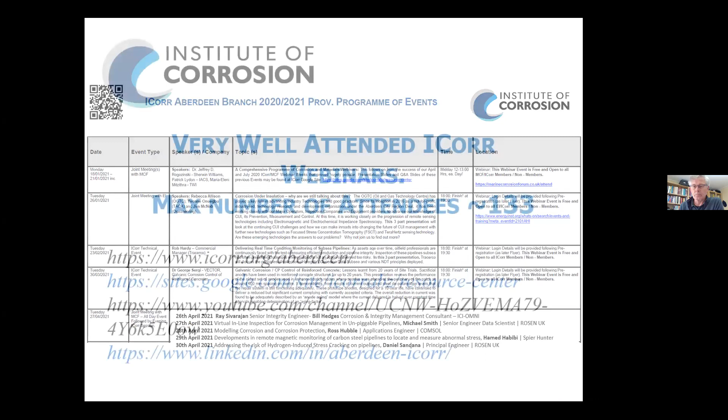And in April, last month, we had a great lineup of webinars with MCF, and it was very well attended, pretty much all over the world. The audience came from many countries, and then we recorded most or all of the webinars and put them online, and it was very well received.

In summary, very well attended ICorr webinars. In fact, the COVID situation has been a bit positive for us because we have been trying new techniques and new ways of doing things. Recently we have put all of our webinars recorded online. Today's webinar is recorded as well. We have been putting all of them on our YouTube channel, which you can see here, the link there.

And then we announce all of the webinars, and we have been doing it for quite a few years on LinkedIn, as well as sending out emails. If you haven't received any email from us, please feel free to drop us a line, and we will add you to our list, and you will be receiving constant updates from us. And if you don't find us from there, please feel free to join our Google group, where you can actually find a good 10, 11 years worth of resources, free of cost, free for use. Anytime you can use them, access them, and if you need any help, please feel free to contact us.

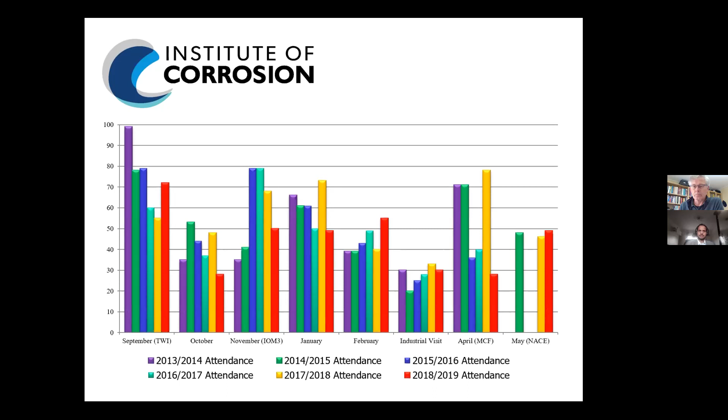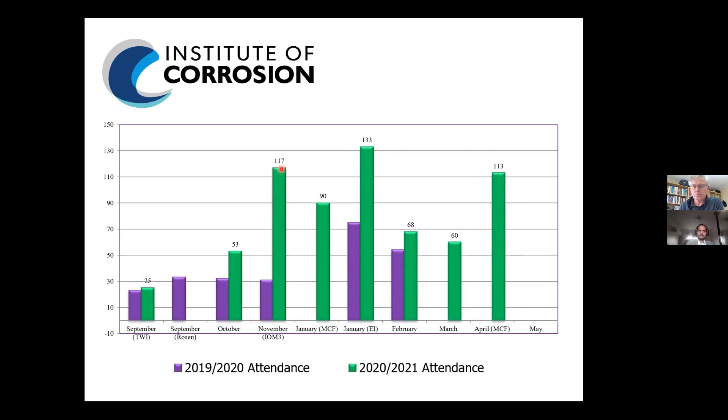So it's been a great year for us. With that, the most important business of the AGM is to continue the good work we have been doing over the years, and to keep it continual, so that we can actually provide support and help to all our community members in Aberdeen, as well as

now internationally as well. So for Aberdeen committee, we have got a kind of a tradition that the vice chair usually takes over the chair position, but we still go through the democratic process of being proposed and being seconded. So Human, Dr. Chetan, who's on the screen, thank you very much for coming on video. Human has been very kind to do the vice chair job last year, and he's been great in accepting the chair position. We went through the democratic process. We have got a meeting every month, so we requested to see if anybody is going to propose him, and

Dr. Olubayo Latinvo, who's Dr. Oli to us, of course, proposed him, and then Bryn Robert was very kind to second him, and with that we have elected Human Dr. Chetan as our chair for next year, 2021-2022. Would you like to say a few words with that?

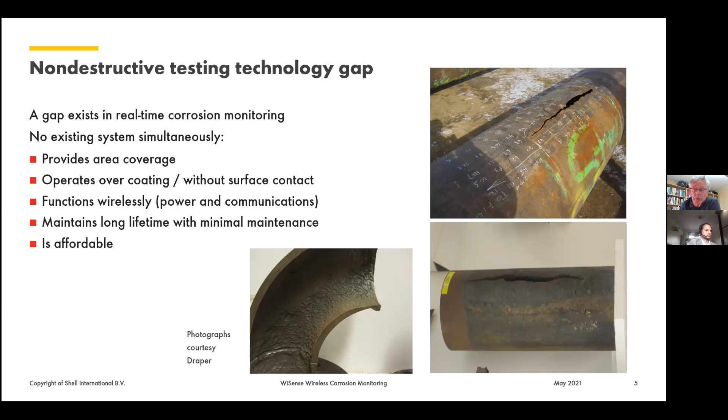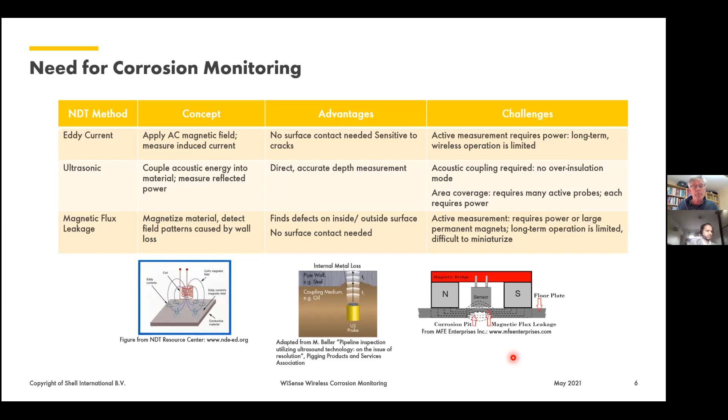And you can imagine that takes power, and that is not a good start if you want to make a system wireless. So we were looking at something that could operate without using too much power and still have capabilities to find local defects. So what did that lead to? Towards passive magnetometry. Not too far away from magnetic flux leakage. And I guess you all working in our industry know that for the inspection of pipelines, ultrasonic intelligent pigs and magnetic flux intelligent pigs are being used. And our technique shares a lot of principles, but it is not actively magnetizing the pipe.

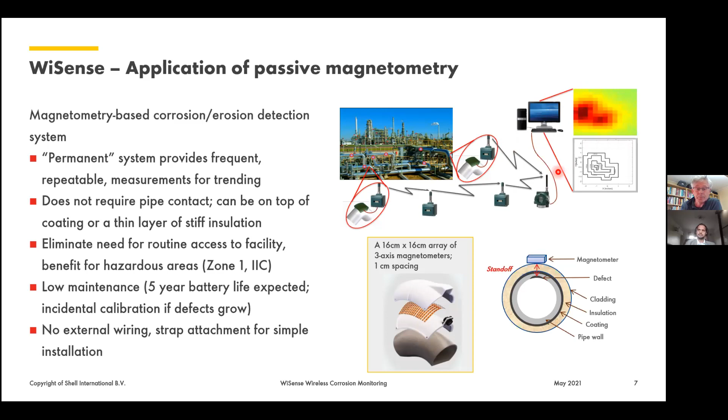A few words about the principle. As I said before, passive magnetometry, it is also called self-magnetic flux exclusion. And that is possible because carbon steel material obtains a magnetic field during the process of manufacturing. When the steel cools down, a magnetic field develops and that stays permanently in the material. And this magnetic field inside the pipe is used for detection.

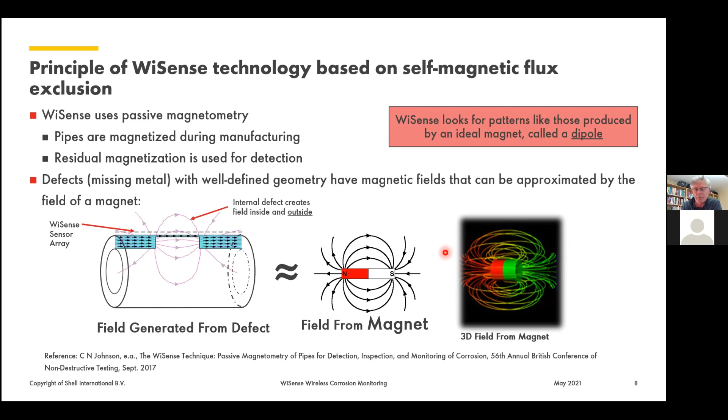It is a three-dimensional field distribution. And to prepare you for the next slides, we measure that in a plane above the dipole, and that creates a certain pattern of fields that we learn to read. We talk about a permanent sensing system.

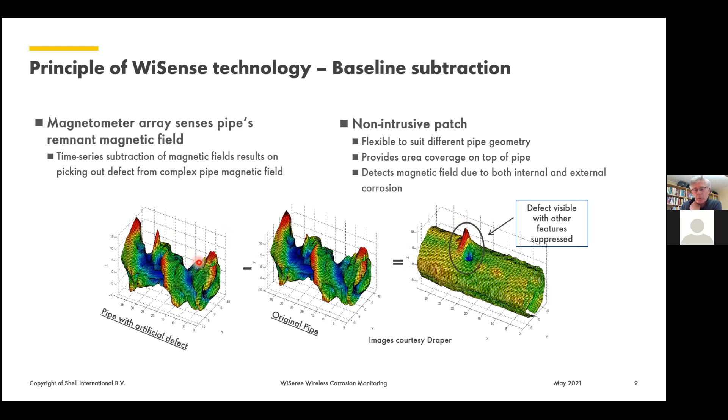So again, magnetic dipole field patterns are excited in the area where the defect is growing. And then the sensors that we put over the pipe are picking up the field, the B, the magnetic induction fields, in so-called maps. I'll explain that later. Our sensors have a square of 12 by 14 sensors in a 6-inch by 6-inch area roughly. That is the standard patch size that we worked with a lot so far.

These magnetic maps show the localized defects in terms of a dipole field. And then there is a detection algorithm that finds the corroded area by searching for such a dipole pattern. And there are complex defects. If there are complex defects, then the pattern that it searches for is a collection of dipoles.

And then there is a defect growth analysis package. So there's a detection package and a defect growth package, and I'll come back to that. That is monitoring by tracking changes in the signal size. It's detecting the growth.

And just to show you what these dipoles look like, I'll ask you to concentrate on the top line. We will not go through all three, but in the top line there are the three magnetic directions that the sensors are picking up. The sensors, as I said before, are the 12 by 14 array of sensors, and each individual sensor measures a magnetic field in one of the three orthogonal directions, Bx, By, Bz. X is along the pipe, Y is in circumferential direction, and Bz is normal to the surface.

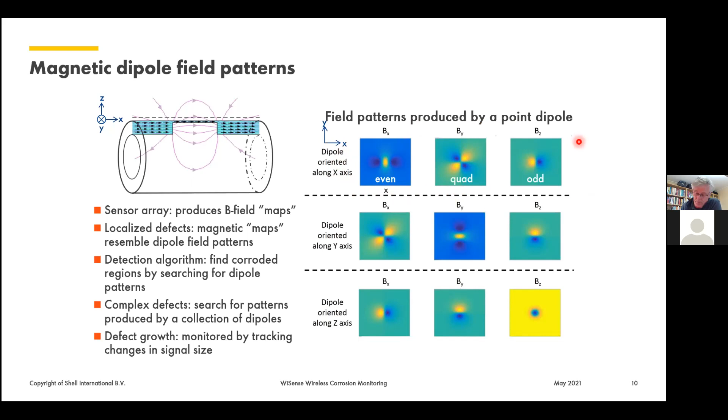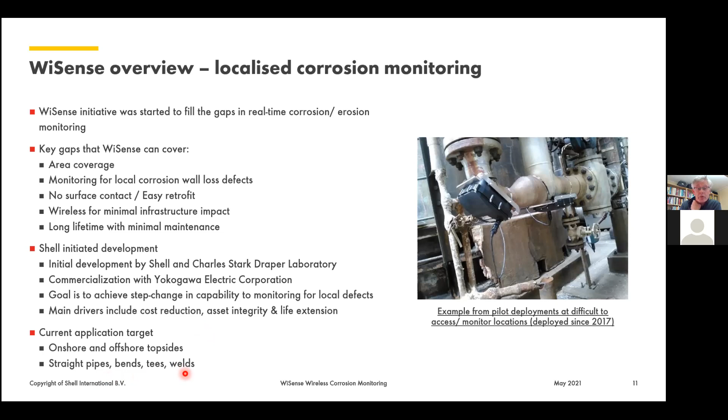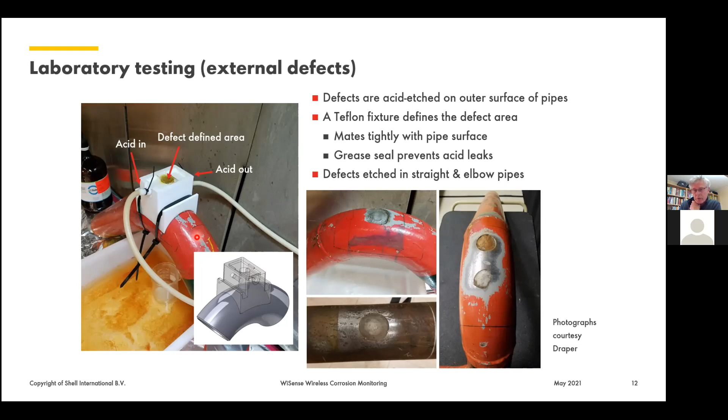We later learned you can minimize it to a large extent, but etching a defect gives you the most natural introduction of a defect without disturbing magnetic fields. But then when you want to do the real testing, you want to have the patch left in place, which means you have to introduce the defect on the other side. And if it is a pipe, you need to create access in the pipe with etching agents, letting the etching fluids run off after you drip them onto the defect area.

And this creates a fairly tedious process, which is something that comes with permanent sensing techniques. And we see that with other sensing techniques as well. You run one test and then the defects have grown to a certain depth, and then you put the pipe aside and start with a new one to generate a second test.

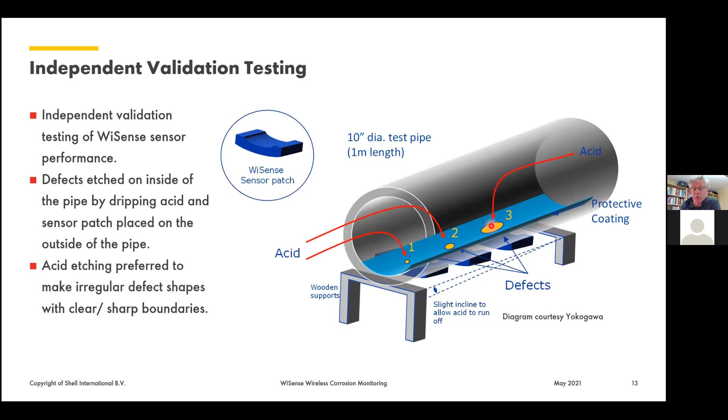We did this with the Welding Institute as an independent set of trials, and that gave us the opportunity not only to measure the defects, but also to create reference data by measuring with laser imaging and replication and ultrasonics, measuring actual sizes in various stages of the growth of the defects. You can imagine that is data that you don't get that easily from a running plant, where you might, if you're lucky, get now and then an ultrasonic reading. So, illustration of something that relates to the analysis process.

What I introduced a few slides ago is that with magnetometry we try to measure dipoles, which are in fact ideal dipoles as point sources. But real defects have a certain extent. And that means that also the field generated is not the pure dipole. And that means that we had to develop a sort of a modeling that the magnetic field is modeled coming from an extended area. And that is then translated into what we call templates.

And when a patch is developing a detection of a magnetic field, then the algorithm is starting to try to match a certain defect template with the measured field. And it is going through thousands and thousands of model templates, trying to optimize the match between what it actually sees and what is in the database of templates. And this leads to a very good detection.

One other thing I like to say, if you try to identify a dipole, the dipole has a lot of redundant information. It has a pattern in the three directions of the magnetic field, the X, the Y, and the Z. And that pattern can be detected when the amplitude of the signal is in fact still in a noise level. So that means you can start seeing the presence of a dipole when the human visual eye is hardly recognizing anything yet in the noise level.

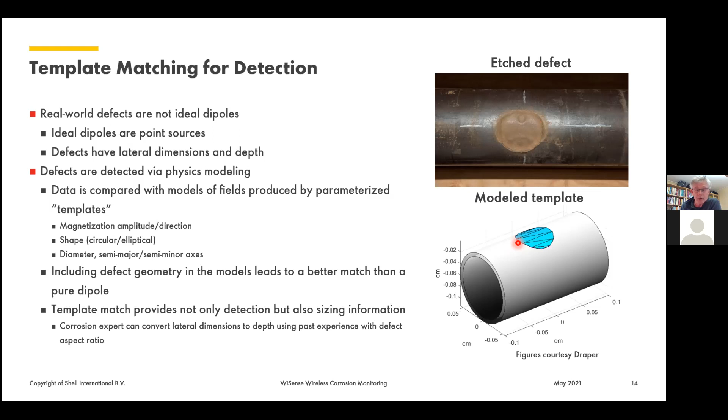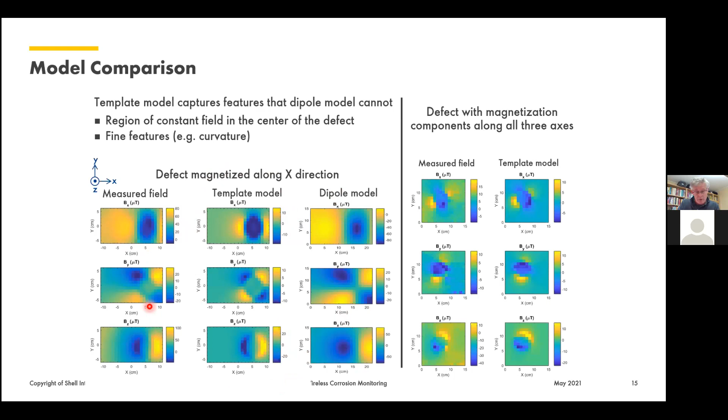Now, highly technical, I want to leave this for a while. And introducing the two algorithms that are supporting the interpretation of the magnetic fields that the patch is picking up. What I said before, it is based on first subtracting the baseline. So what you measure on day 1, day 2 is taken as a baseline, and then you subtract it from all the subsequent measurements.

And typically we collect with this system 1 measurement a day, midnight, to reduce all sorts of temperature effects that might introduce small variations. So a very stable midnight measurement in a day frequency. And that has proven for corrosion mechanisms to give you a nice measurement sequence that allows you to see a gradual change when the defect is growing.

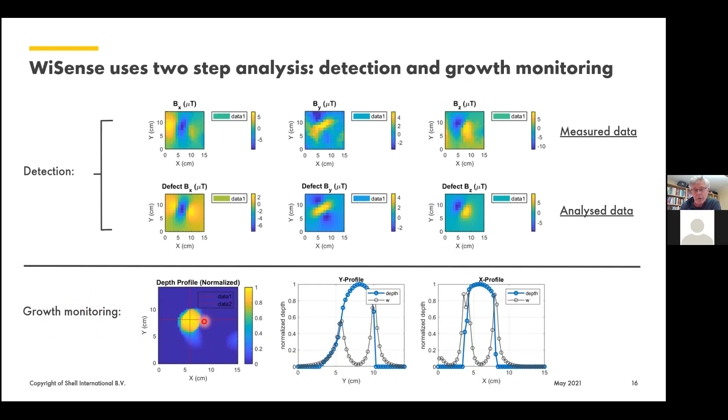Then it goes into what we call depth profiler to monitor the growth of the indication. And that is taking the data and identifying what the extent of the defect is. This is done in a profile, a graphical profile represented. Same information as in the heat map on the left. And this is on the display of the screen of the end user. And over time, and I will show you later a series of measurements of real defect, you can see the evolution of a defect growing.

On the practical side, if you look at what you could in principle achieve with measuring with magnetometry and mounting patches on locations where you expect local damage, I think you immediately recognize the typical locations where, due to flow disturbance, deposits, injection, you can have aggressive local corrosion, and that is where the technology is able to work.

It also works on top of a weld, which means that any pitting generated in the root of the weld is also measured. And that's a strong aspect of the technique, because if you look at the inspection side, you need much more complicated NDT, non-destructive testing techniques, to measure what is going on in the root of a weld than in the parent metal next to it. So the capability to monitor over the top of a weld is a very strong one.

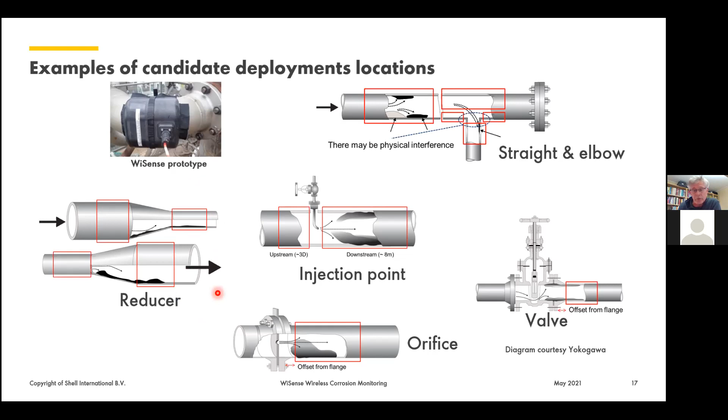Then the practical side of installation. Here there is a photograph with the patch, and now with the wireless device strapped on the support next to it. Here you see another situation with a device, and the wireless devices are connecting in an ISA100 network to an access point, which is then routing its data to a gateway.

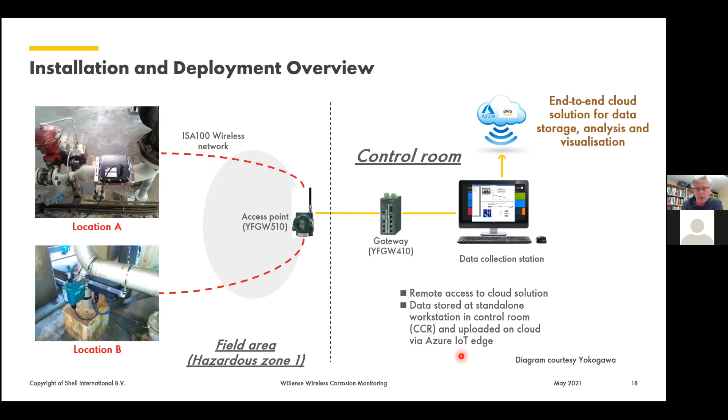And from the gateway, it is arriving in the cloud environment, which can be an end user cloud or a cloud supported by Yokogawa. At the moment we have the patches running, and a lot of work to get everything running in an Azure IoT cloud. That's still quite a step to get that properly working.

Unique position of WiSense for localized degradation. If you look at the mechanisms, it's only on the right end where ultrasonics is the champion technique, for uniform corrosion. You probably know of PermaSense probes, the first wireless monitoring devices in our industry that found a very broad market, perfectly working on uniform corrosion, extensively used in refineries where there is high temperature sulfidation creating very uniform corrosion. But as soon as you go away from that mechanism, a lot of mechanisms can become, sometimes a mix, but extremely local in the attack of the wall. I don't need to explain much, but it is the challenge for inspection, and also for monitoring, to get devices that can detect the onset and the growth of such local defects.

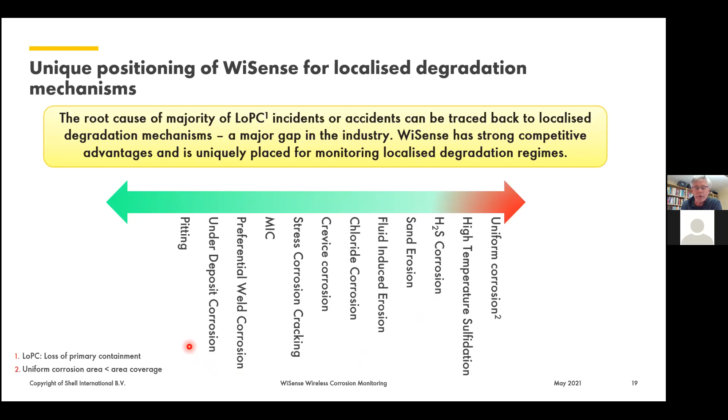Here is an example of one of the patches from our field trial. You can see December 2017 was when the patches were installed in the refinery. This graph goes all the way to October 2018, end of last year, showing the initial stable condition. Then we saw the statistical indicator, the blue bars, going up, telling us that there is a change in signals and that there is a clearly detectable signal present.

Then with the growth monitoring tool, the depth detector, the orange line showed the growth of the defect, and then becoming stable with a slight variation, but virtually stable. We missed a window during a turnaround and also a subsequent error in starting up the sensors, but fortunately saw it coming back on the same level, and then another excursion started. This is where the power of the monitoring comes in.

If we communicate this to our corrosion engineers and also the technologists, the process engineers together, they can start working on correlating such start and stop behavior of defects with the process conditions, and how the process conditions then influence the corrosion rate, the aggressiveness of the corrosion mechanism.

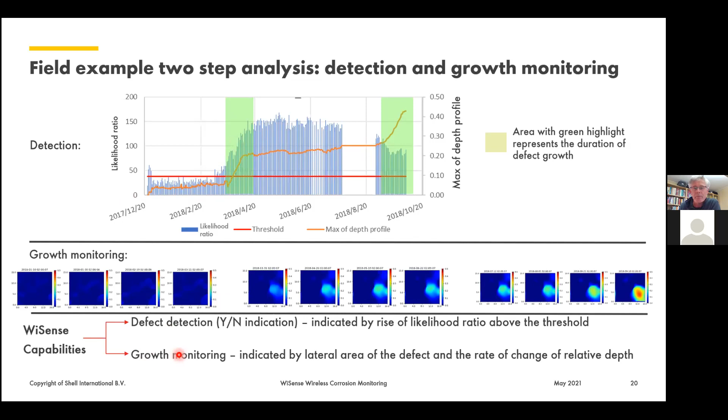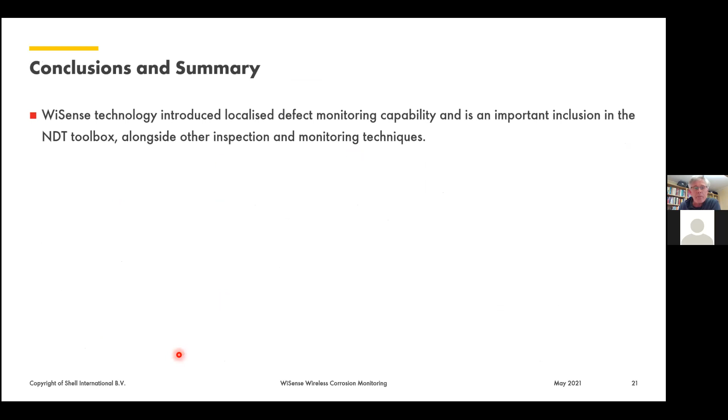So conclusion summary: WiSense technology introduced for local defect monitoring capability and is an important inclusion in the NDT toolbox, alongside other inspection and monitoring techniques. The WiSense technique has demonstrated robust performance over 3 years of pilot testing in multiple assets.

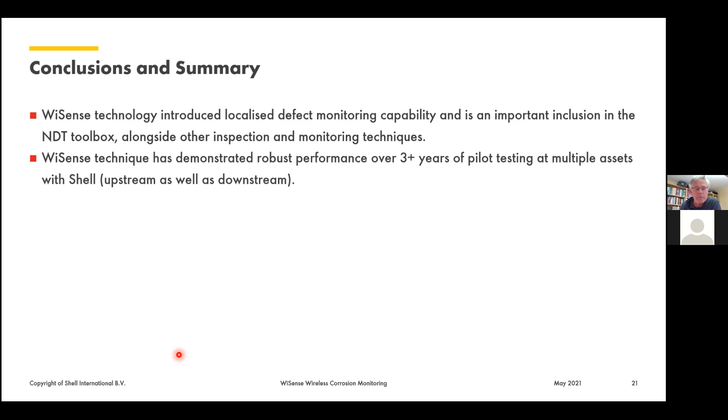We have been, as you saw in the photographs, in a downstream environment. We're also monitoring for 1.5 years in an upstream land-based environment. It's highly sensitive for localized degradation, and it allows proactive monitoring and prediction of pipe integrity when used alongside simulation and prediction tools. Highly sensitive in the sense that if we try to confirm defects that are in the early stage of detection with ultrasonics, quite often we are not able to distinguish them reliably.

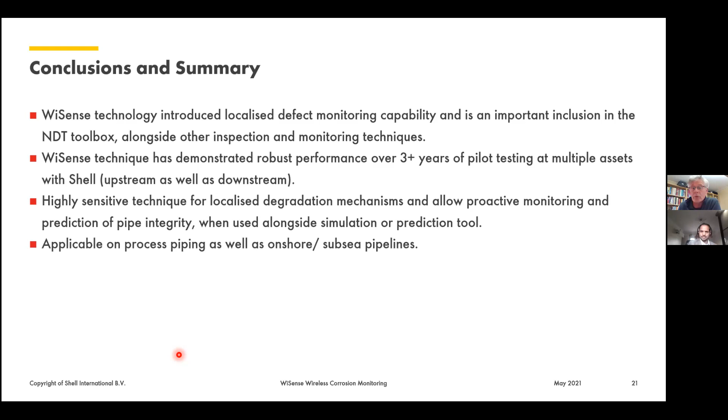Then we talk about a few tenths of a millimeter depth of defects. And it is applicable on process piping, and it's carbon steel. Please remember that it's not working on stainless steel that doesn't carry magnetic fields to that level as carbon steel. And the environments where it is applicable is onshore, but also subsea pipelines, carbon steel pipelines.

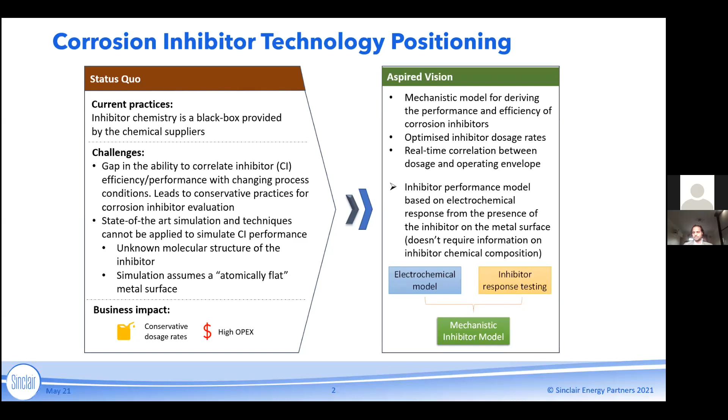A couple of points on the corrosion inhibitor. The most common term used is CI efficiency, which is how efficiently the corrosion inhibitor is able to bring down the uninhibited corrosion rate. Typically, as I was saying earlier, it tends to be a single number, or a few numbers that come out from CI qualification.

It's common practice that CI qualification can only be done on a certain number of points. We assume that they are the worst case points from an operations perspective, but there is a lot of judgment in that exercise. And from a mechanism perspective, the CI efficiency, as we all know, is variable.

It does change with variables like a few we have listed here - the process conditions, or what's in the production and how that's changing over time, or even the electrochemical reactions, which electrochemical reactions are governing. And what we have found is that the CI performance is actually quite complex.

It's very non-linear, it's very fractal in nature. So it's difficult to have a graph where we can linearly extrapolate a CI efficiency for, let's say, 10 to 20 years life of an asset.

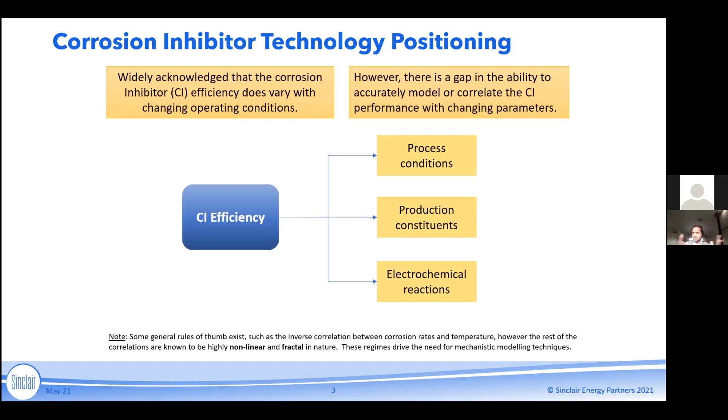So I'll give one example of why this mechanistic approach of being able to model corrosion inhibitors is important, and then after that I have a few examples to show on what the model itself can do.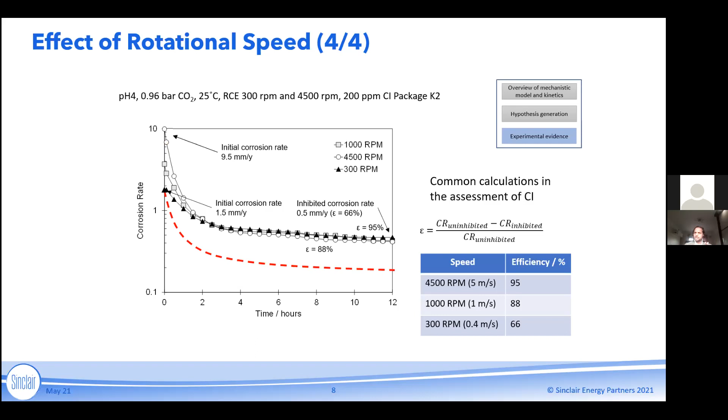If we look at the efficiencies across all three scenarios, the CI efficiency ranges anywhere between 66% to 95%. Efficiencies close to 90 or above are regarded as very good, but 66 is concerning. This experiment brings up a couple of questions: what is changing the CI efficiency by such a big margin, from 66 to 95? And this was just varying one process parameter. In reality, many more parameters will change, so what will that do to CI efficiency?

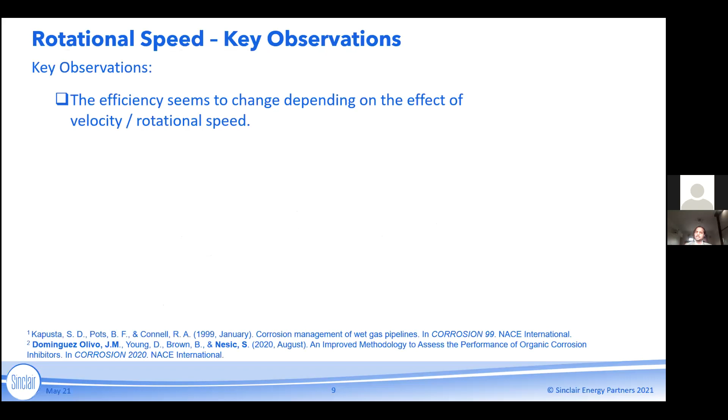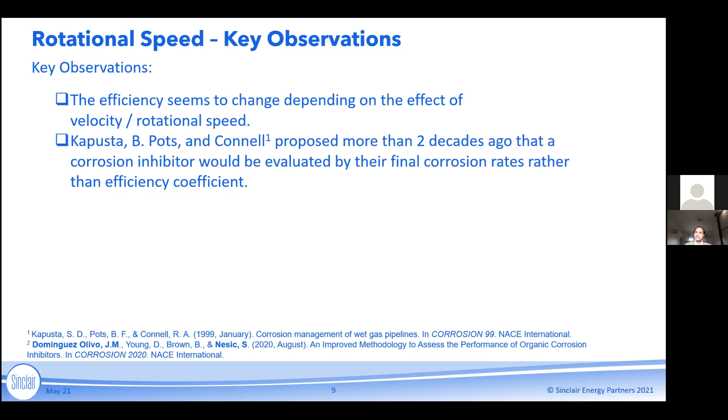This problem isn't anything new. About two decades ago, a couple of experts from Shell, Connell, Pots, and Kapusta, described that the evaluation of corrosion inhibitors can't be done by looking at just the initial and final corrosion rate. Efficiency is really not a good way to look at it, because, number one, it's not constant, and number two, it cannot be linearly extrapolated.

So the question that arises is, this was only one variable which we varied. What if we change other variables, like temperature or pH or any other conditions? What will that do to corrosion inhibitor performance? It's essentially these questions which we're trying to answer with the mechanistic inhibitor model, to look at the underlying mechanisms occurring in the presence of inhibitors under different conditions and concentrations, and then simulate what the inhibited corrosion rate will be.

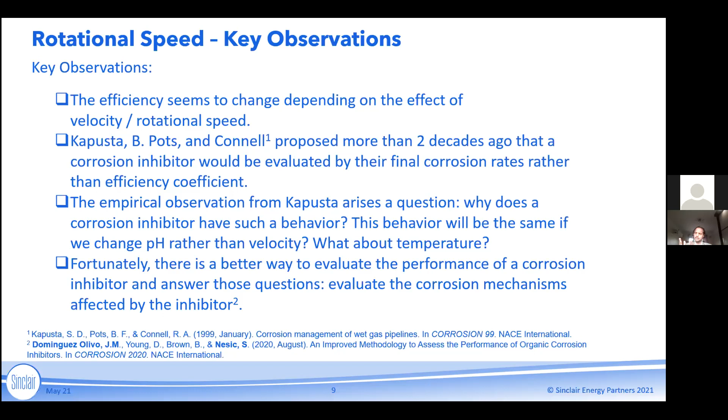I'm conscious of time, but I'll walk you through a few more examples.

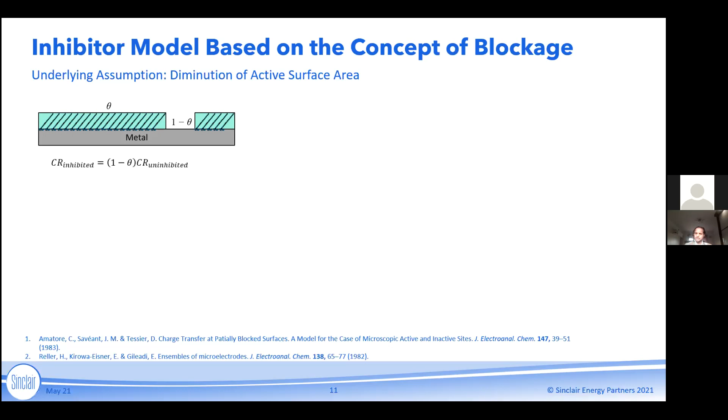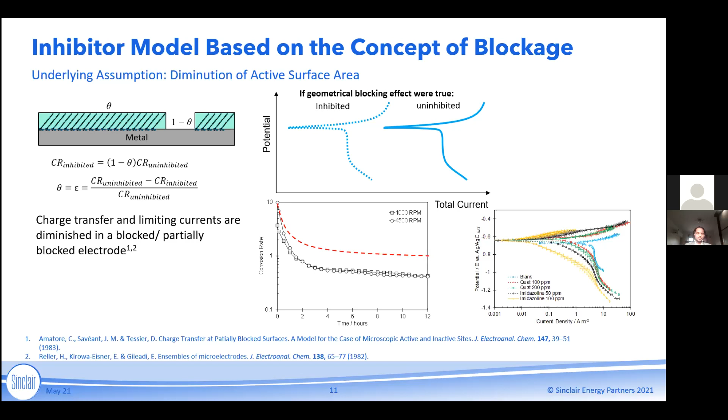So there's a few more examples in the slides where we have a case study where we change the speed, temperature, pH, concentration, and then we are able to see in all those scenarios that the inhibited corrosion rate could at times, and several times, be higher than what we would otherwise assume by just going with a simplistic CI efficiency based approach.

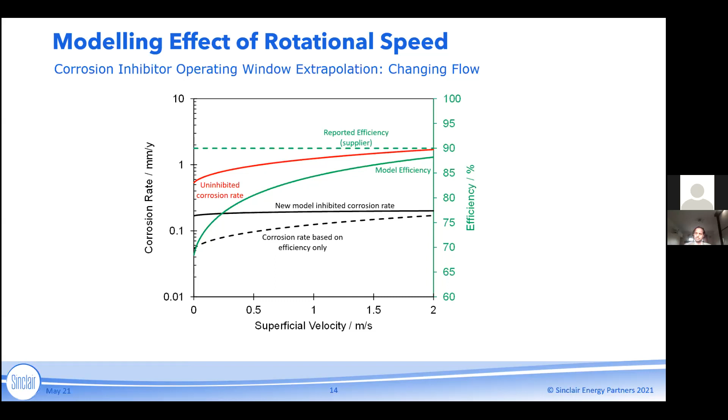So that's everything, a snapshot of what the model looks like. We're able to simulate CI across different process parameters. A few examples there are the velocity, temperature, pH, partial pressure. And then we are also able to backtrack with what are the governing electrochemical mechanisms giving us this answer, and how that is varying with the process conditions that are expected over a long period of time.

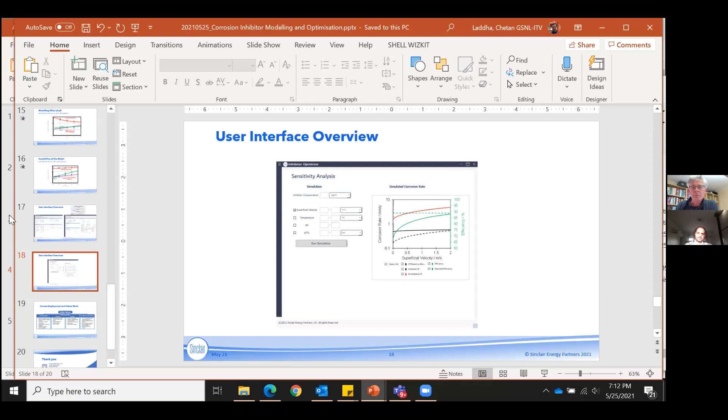Many thanks for the talk, and the question is, I was just wondering about the temperature limitations for this equipment. Can you advise, please? Yeah, sure. Good question. The patches are at the moment being used with a very short distance to the pipe, so they pick up the heat from the pipe despite a small gap. The electronics is specified for up to 80 degrees. So the patches operate very nicely in upstream environments, also in other conditions, low temperature.

We have looked into bringing the patches to higher temperature. One way is putting highly insulating material in between the pipe and the patch. That brings it up. We have done modeling in the range of 200 degrees. That needs to be experimentally tested much further, particularly now the new commercial patches are available. There's also potentially a longer term improvement where the electronics is redesigned for slightly higher temperature. Then in combination with insulation, a higher temperature range is achievable. Okay, great, thank you.

Actually, one question myself about inspecting the insulated item. What is the limitation for the insulation thickness and any cladding on top of the insulation? Yeah, we have tested it up to a few inches, but went back to operating the patches very close to the surface. That is where you get the strongest signals, and the highest sensitivity for local defects.

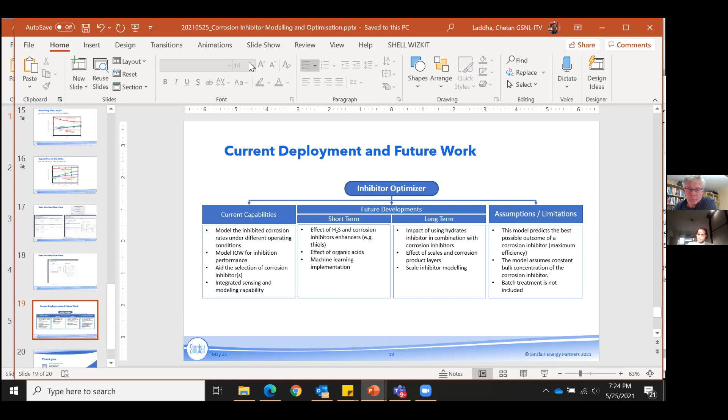The next one is: what are superficial velocity limitations in the model? As far as I'm aware, there is no limitation to the superficial velocity, but I do have my colleague here, Juan, who can confirm that. Yes, hello everyone, my name is Juan Dominguez. Basically the model assumes a correlation between the rotating cylinder electrode and the mass transfer mechanisms associated with a pipeline. In this case, we use the Eisenberg correlation, matching the mass transfer coefficient by using the Sherwood number.

So the limitations are more realistic ones. For example, if you have a pipe running at 3 or 4 meters per second, the model can capture that. However, how realistic is that? Because it'll be extremely turbulent, and those conditions are kind of unrealistic. From the superficial velocity perspective, the basic limitation is matching the mass transfer coefficient associated with this rotational speed with the real ones, and how you trust these correlations. If we could measure the mass transfer coefficient realistically, we would remove that limitation, but it's a difficult experiment. That's why we rely on these correlations. Hope that answered the question.

Yeah, thank you. And maybe a continuation of the same question is about qualification of inhibitor for welds. It's quite tricky. You have different efficiency for welded and non-welded items. So how do you address that? Is it one of the parameters you are considering? Could you repeat that, please? The presence of weld is always tricky when you are qualifying inhibitors. So how do you consider the weld presence? It's one of these geometry things. Yeah, that's a very tricky question. It's a very good question.